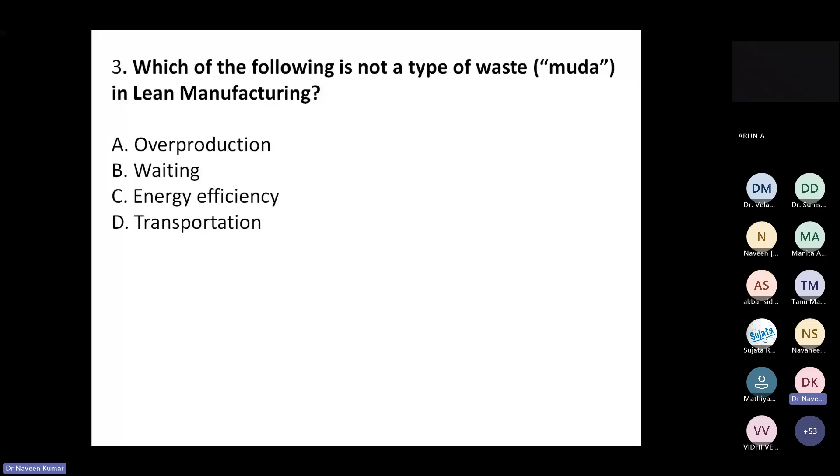Now, sustainability in manufacturing includes which three main dimensions? I think last session you already covered this. It's economic, environmental, and social. Wonderful.

Really appreciating the response in this second half. Which lean concepts promote sustainability by reducing resource and energy use? I think you are aware of these terminologies: Kanban, 5S, SMED, Jidoka. It's B - 5S is the key to implementing sustainability in the lean concept.

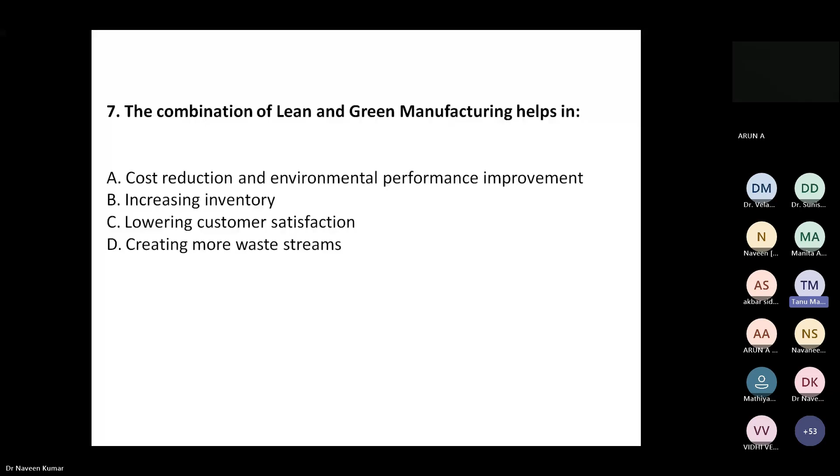Next, the combination of lean and green manufacturing helps us with A, cost reduction, and A, environmental performance improvement. Wonderful. Which metric best evaluates sustainable lean performance?

Energy consumption per unit. Great, sir, nice, this is the correct answer, A, energy consumption per unit. Yes.

Now let's move on - I think you've already covered much more topics. I'll take you through some techniques and terminologies used in manufacturing industries. First we'll cover some theory, then go through some case studies. My topic is sustainable lean manufacturing in automobile manufacturing.

As you already read, sustainable lean manufacturing is the manufacturing of goods through pollution and waste-free processes, which improves the environment and conserves energy with high economic impact. The very important terminology I focus on is the 3P: people, profit, and planet. The blue one is the sustainability part, right?

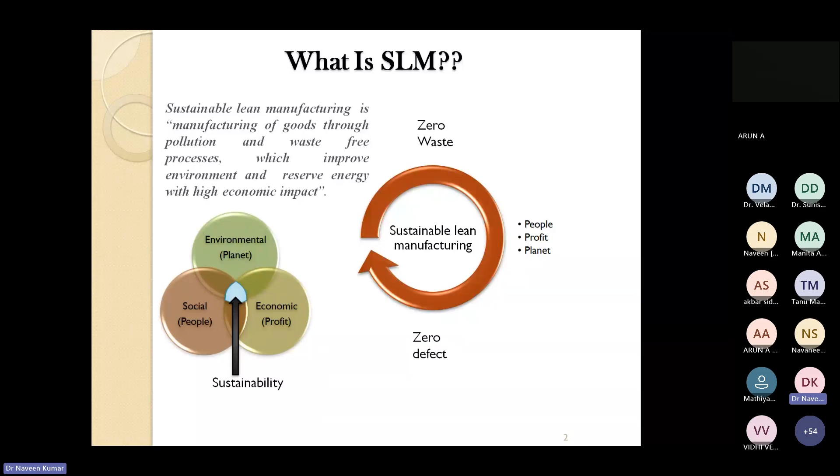Now, what is circular manufacturing? A circular economy is an economic model that eliminates waste and regenerates systems. The working principle is to design out waste and pollution, keep products and materials in use, and regenerate ecosystems. Both techniques are equally important and relatable, because sustainable lean manufacturing talks about economy and environment, and here also we focus on both.

Why does circular manufacturing matter to us? It reduces raw material dependency, enhances ESG and brand sustainability profile, supports compliance with environmental standards, and enables cost savings through reuse and recycling. The focus of the circular economy in manufacturing today is on reuse and recycling.

ESG is now a brand image for the automobile industries. Whichever supplier has the ESG rating and performs well on ESG criteria has a good brand image as compared to others.

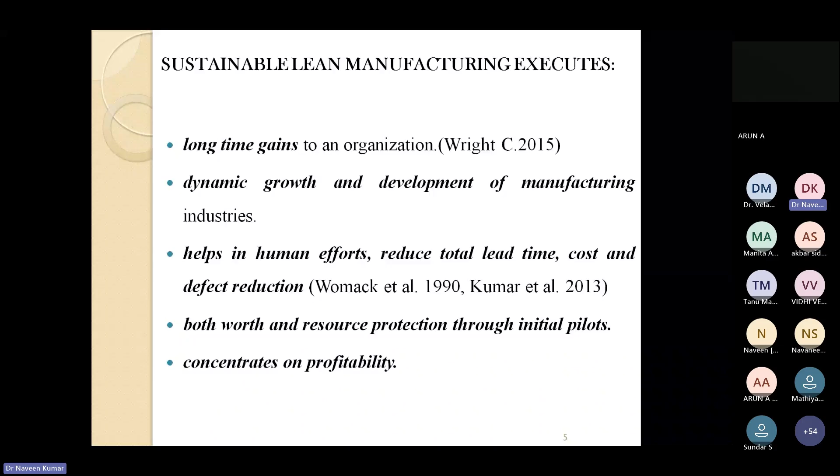Now, if we talk about sustainable manufacturing among the processes, as I explained, I really appreciate all of you. You contributed a lot in the MCQs, and mostly the answers were correct.

Again, in the sustainable manufacturing process, first we take manufacturing cost. As I explained in the previous slide, manufacturing cost reduction is the ultimate demand of the customer. That should be minimum. Now the environmental impact should also be minimum.

And energy consumption, leading to all the environmental impacts - as of today, what we are doing in our industries is moving towards solar energies. We are implementing ways to reduce energy consumption throughout the processes. That should be minimum, and waste management should be maximum.

Waste management - don't confuse it. It means how to manage the waste. We have to drill down the processes in depth to identify where the process is and where waste generation occurs, and we have to eliminate all the impacts at the processes where waste starts. At that moment we have to control the waste. The need for waste management should be maximum.

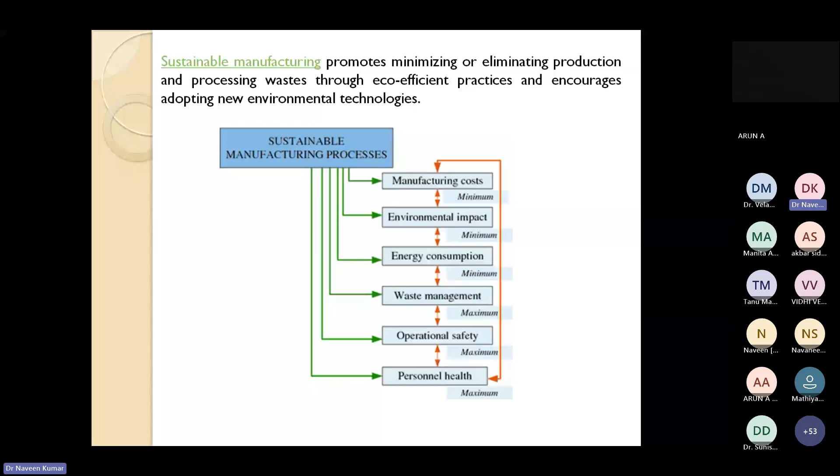Now, sustainable lean manufacturing focuses on society development, employee growth, and motivation for society. Motivation for society means employment generation, educational goal setting, and helping develop the same. It's very wonderful - many organizations and industries have started sessions for the children of employees. They start coaching at the 8th and 10th standard stage, focusing their ideas in our operations, as well as motivating employees to contribute to other business development activities and ideas to take forward.

Now, the environmental aspects focus on green environment, working environment, energy conservation, recycling, reuse, and reprocessing material. As I already touched upon during circular manufacturing, recycling, reuse, and reprocessing material is equally important to achieve the ESG goals. This is the main criteria industries are focusing on and using in day-to-day activities, and one of the most important is following international standards.

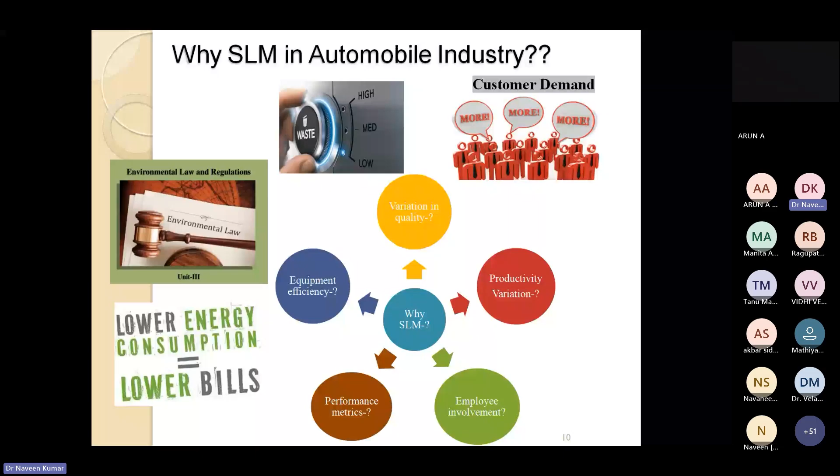Now the environment impact of manufacturing. The manufacturing process, I think you already covered in a previous session: working material and input energy, electric, fossil fuels, then output product, byproducts, and output is greenhouse gases, various pollutants and toxic solid waste. It's contributing again to global warming, and that is not good for human and our ecosystem.

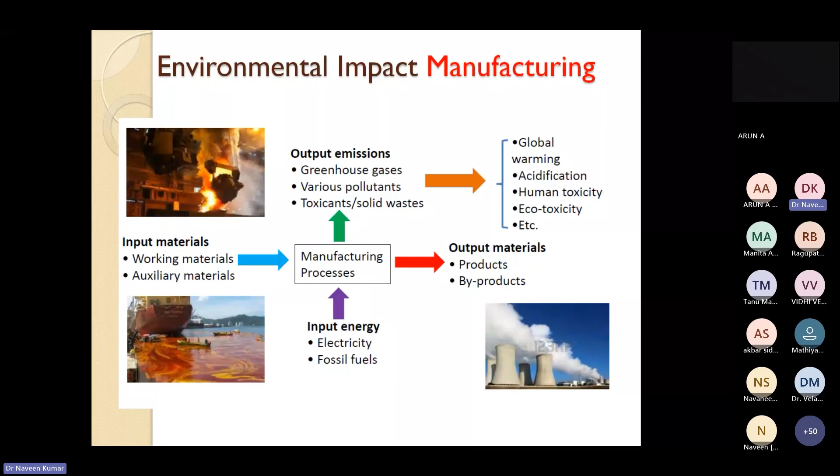We are touching the highest ever sale, all other two-wheelers and four-wheelers. From the last 10 years, the highest ever sale is going to happen this year and this festive season, right? The consumption rate is daily increasing. Our sustainability rate is quite down. We have to focus upon minimizing this gap.

And how will we achieve it? It is the challenge. It is the day-to-day work upon. We'll discuss in upcoming slides.

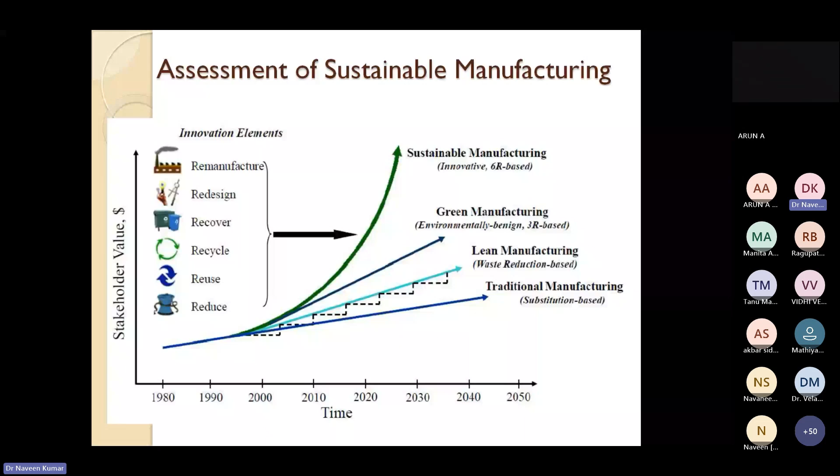The assessment of sustainable manufacturing, we started from traditional manufacturing. Lean manufacturing we worked upon, green manufacturing we worked upon, sustainable manufacturing. Now we are working on all these together and moving towards ESG goal 2050 and somewhere focusing on the 6R.

Now the sustainable manufacturing processes, what we should do to achieve that gap and to achieve that slope. What is our requirement? We must use optimal usage of energy, material, labor, and other resources, which leads to minimum waste and minimum emissions.

This is the prime responsibility of a product development manager who is leading that project, right? Now we have to produce sustainable products that can help our generation and give minimum impact on society. And these inputs come from the product design and the process design.

The design for sustainability principles, focusing on functionality, recyclability and remanufacturability, start from the design stage, right? And the processes start with energy efficient technology adoption and safety-free, safe environment, accident-free, focusing on the

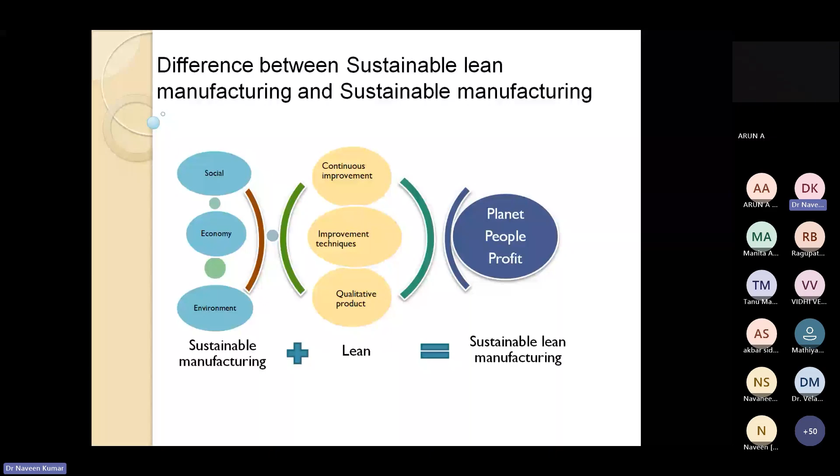Now, there might be some doubts about sustainable lean manufacturing versus sustainable manufacturing. Sustainable manufacturing is social, economic, and environment, and lean focuses on continuous improvement techniques and qualitative products. That is focusing on people, planet, and profits. This is what it's called, and this is the prime output for sustainable manufacturing.

Now, sustainable manufacturing to promote the circular economy is only feasible through a total and multi-life cycle based approach to close loop material flow by adopting the 6R as we discussed.

Now what is important in this slide is the one message we have to focus on: to reduce in every life cycle stage. We have to focus on reduction, right? We have to reduce the process time, we have to reduce the wastage, we have to reduce the distribution lead time, and the resource consumption in every stage. It is very important nowadays. We have to focus.

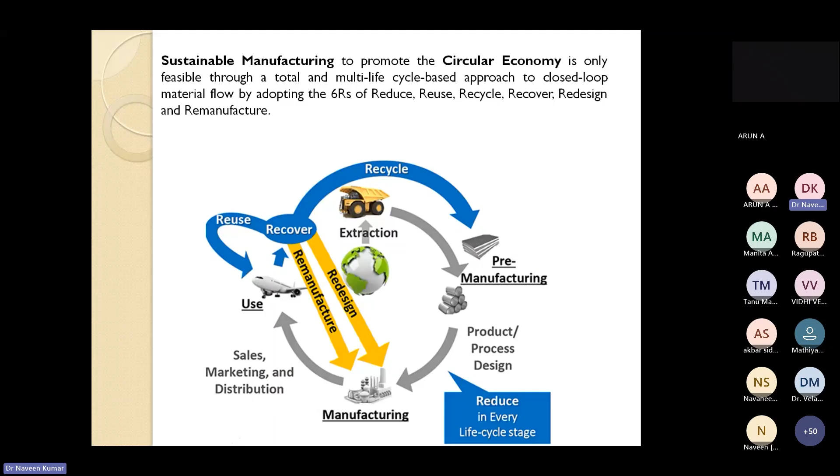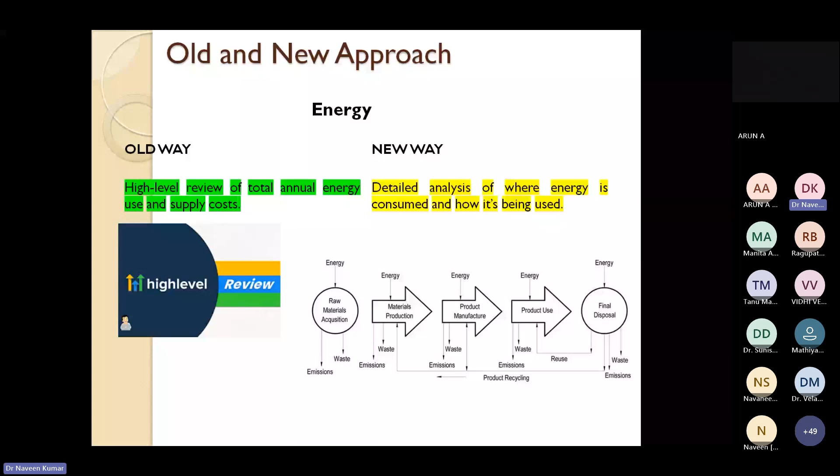Now the manufacturing, year on year and month over month, production comparison of resource utilization.

Hello? Am I audible? Yes, sir, you're audible. I think there was some disturbance, something happened.

Now the new way is real-time examination of resource utilization, location, and rationale. It's live streaming of production, output rate, quality rate, and performance rate. Everything is now online, and we can get the data and store it, track who is doing the activity, who is giving the output, compare resources, and allocate the best resources for the best operation to get maximum output.

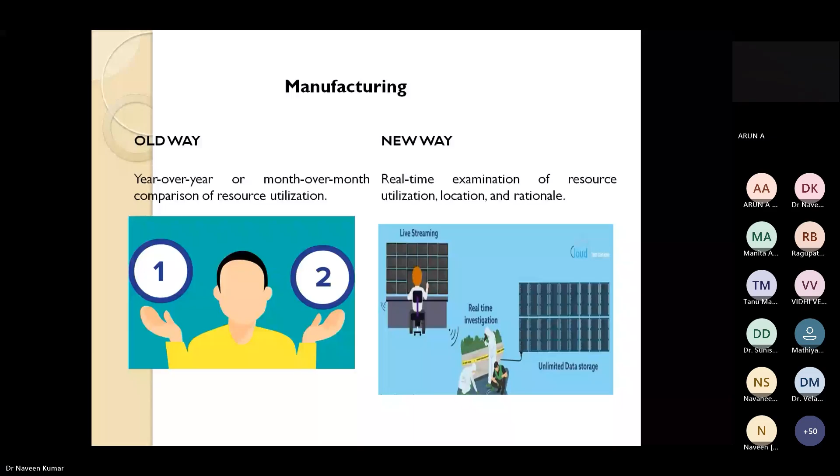For process excellence, we have focused on these ways. Now the important thing is waste analysis. We started in the old way with problem, solution, then success. The new way, we focus on root cause analysis processes, day by day, starting from failures.

We start from customer feedback, then we prove the process, identify the process, and start multiple agencies involvement, cross-functional team involvement, in analysis of that particular process to stop creating waste in the first place.

As I already explained, focusing on first time right, we have to reduce waste at the first operation only. If there is generation, we have to reduce it. We have to make zero waste, zero defect at that process.

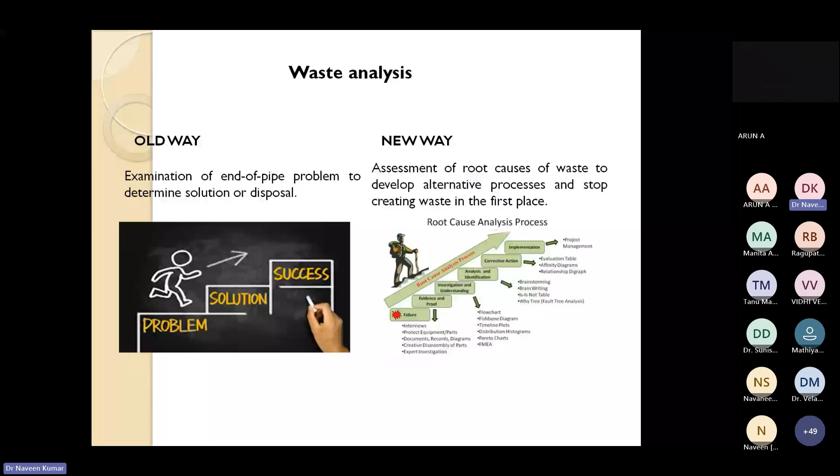We are focusing on the innovative elements of sustainable manufacturing: product innovation, process innovation, and system innovation. We distributed all these innovations to respective departments and stakeholders, making them responsible, and taking it forward for organizational improvement and goals. This helps us implement the best way to get maximum output.

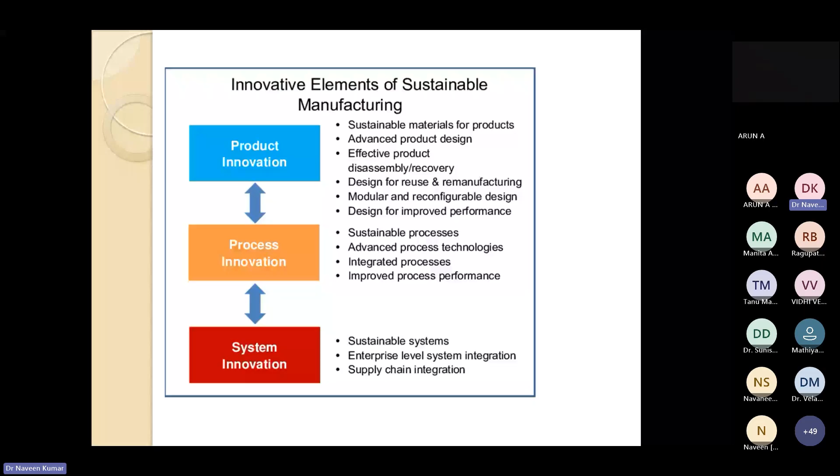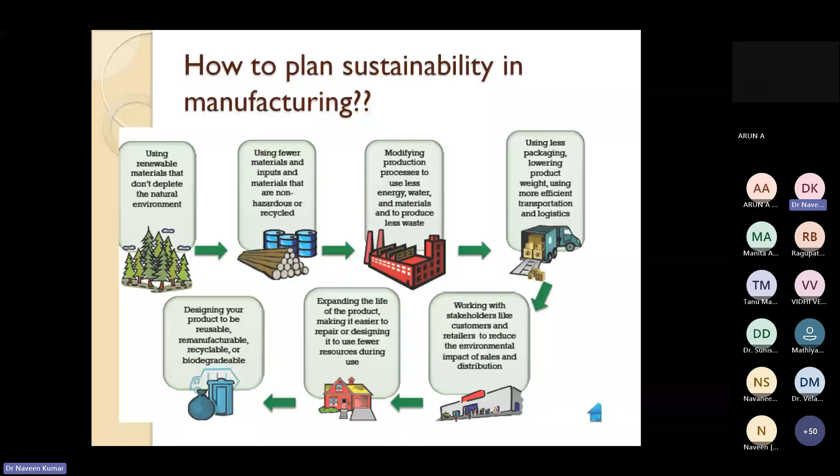And this, thank you. Now let's take you through some of my problem statements and case studies.

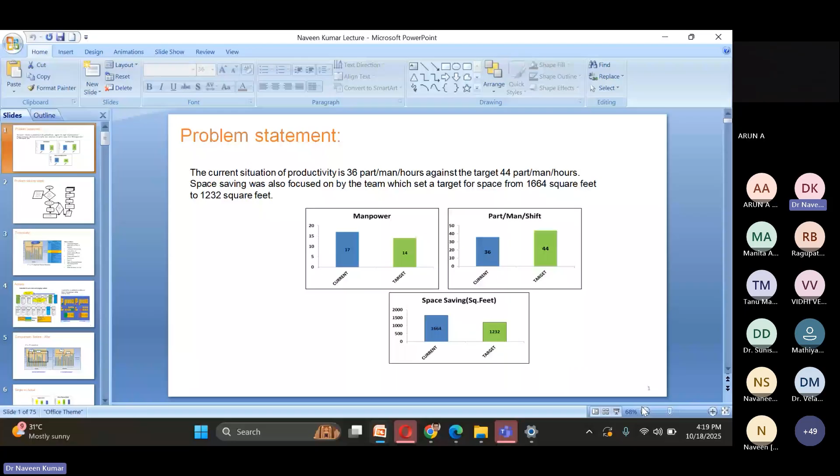The problem statement was at the supplier end: productivity was less against the targets, and the space available at the organization was also less. So what we targeted was to reduce manpower, increase parts per man per shift, and achieve space saving as well.

We focused on the problem solving steps, PDCA, and started sustainable lean manufacturing. We went to Gemba, listed down all the inputs, processes, and times, and started verification, implementing actions, horizontal deployment, and standardization. We used these problem solving steps.

During the time study, what we found: there are 17 operations in this fuel filter assembly line, where operation 7 has the maximum cycle time against a takt time of 36, with a cycle time of 47.

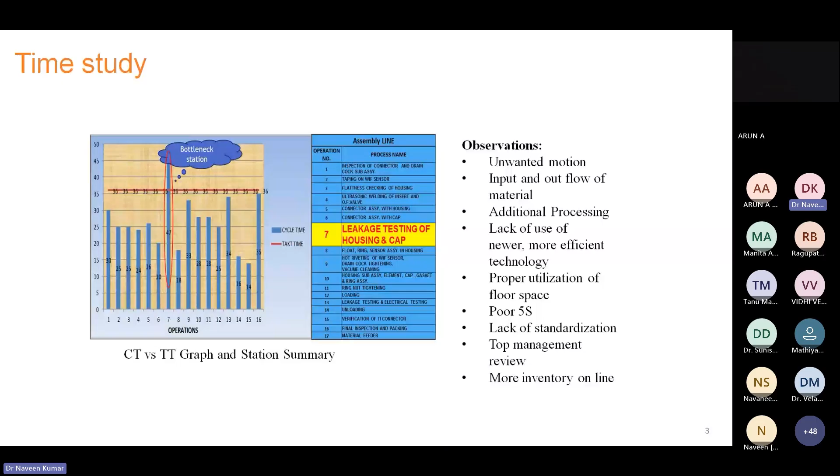These are some observations we found during videography analysis, and we identified actions for each observation. We started reducing cycle time by converting non-value added activity into value added activity, and started elimination and merger of two workstations to reduce space as well.

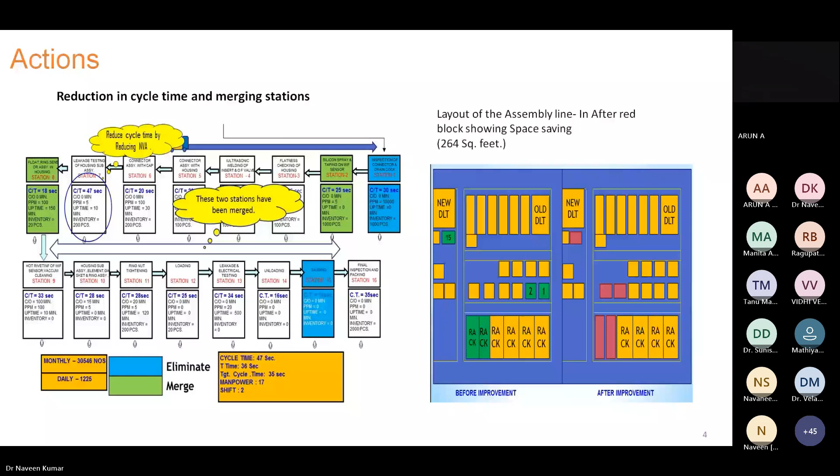Before improvement, the layout was on the left side, and after improvement the red highlighted cells were eliminated. These are the comparisons before and after: the cycle time is now reduced, shown on the right side, and we went from 16 workstations down to 13 workstations, with the maximum cycle time now at 35 seconds against the 36 second takt time.

Now we did a manufacturing implementation through a case study of total employee involvement. As I explained during the matrix of sustainable lean manufacturing, we did analysis and data collection on

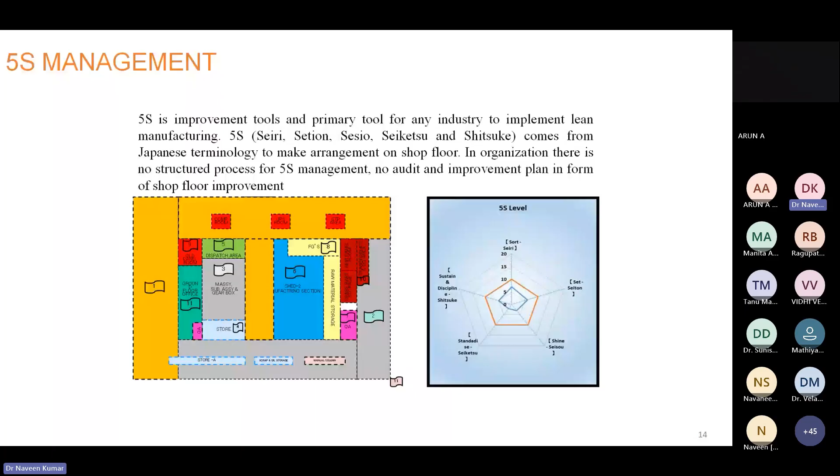Now it is very easy for the organization to deal with 90% of problems through total employee involvement. As at the start of the question, 5S is important for implementing lean, and lean is in relation with sustainable manufacturing. We started quality circles as well as involved employees in the PDCA approach.

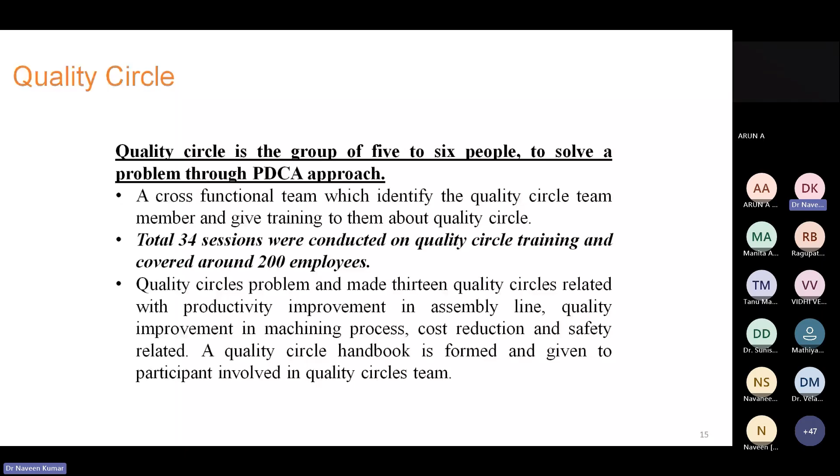We started CFT - cross-functional teams - to get the session, get the training, and around 200 employees got involved to start these sessions and benchmark the assembly lines and quality improvement in other machining processes, as well as some safety related measures. As we see, the performance matrix changed after implementing this data,

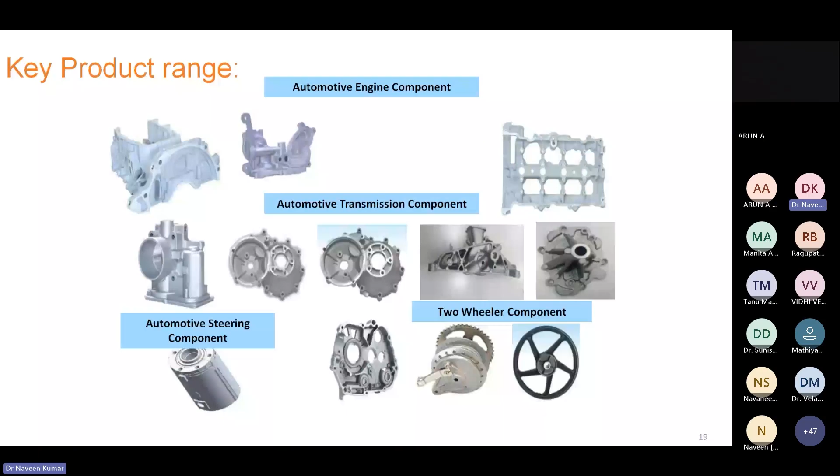Now, this is another case study of manufacturing some transmission components. The approach was to collect data on natural resources, pollutants, and factors affecting environment directly or indirectly, and an input-output diagram of critical processes, to identify improvement gaps and projects, and take measures to reduce consumption at the first

step. If not possible, explore the possibility of reusing and recycling it, and look for new technologies to reduce consumption. Measure the trend and action, standardize and deploy horizontally at all applicable areas. We used this approach to get this implemented.

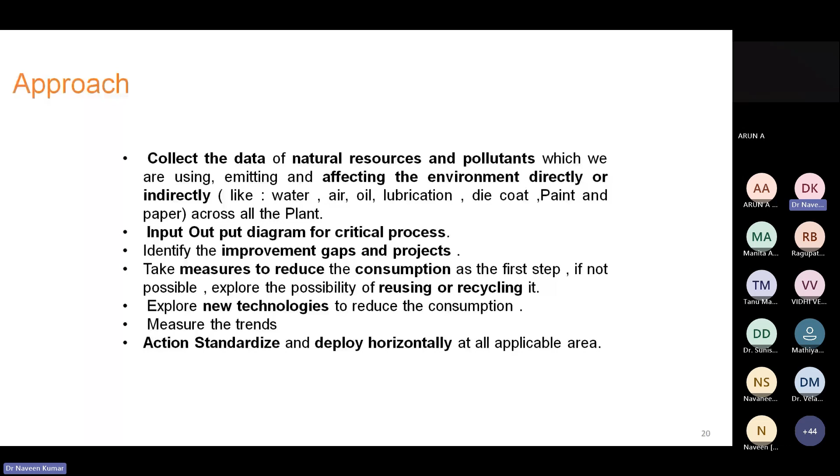We started with a policy in place to get it implemented throughout the organization.

We defined the organization chart and implemented coordinators, pillar code leaders, and members equally in different pillars like energy management, water management, waste management, prevention of pollution, substitution of hazardous chemicals, and environment compliance and management.

We put every pillar under a department head or a person who has the best knowledge of that particular process. He is the owner to lead this pillar and is helped by the CFT members, which helps get all pillars in place and reviewed by the top management.

Then the master list of the organization process we mapped and key sustainable aspects. We get input, electrical energy, fuel, gas and water, energy utility management, transformer, DG air compressor, water treatment plant, air handling units, and cooling towers we mapped.

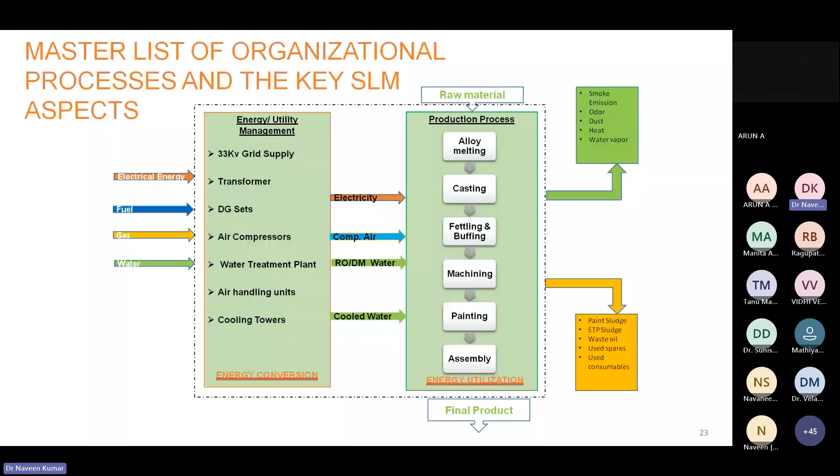Then we found there is output of electricity, compressed air, RO water, and cool water. And using this process flow: raw material, alloy melting, casting, fettling and buffing, machining, painting and assembly, and energy utilization and the final product. The output to this is to the environment: smoke, emission, dust, heat, water vapor, paint sludge, ETP sludge, waste oil, used spares, and used consumables.

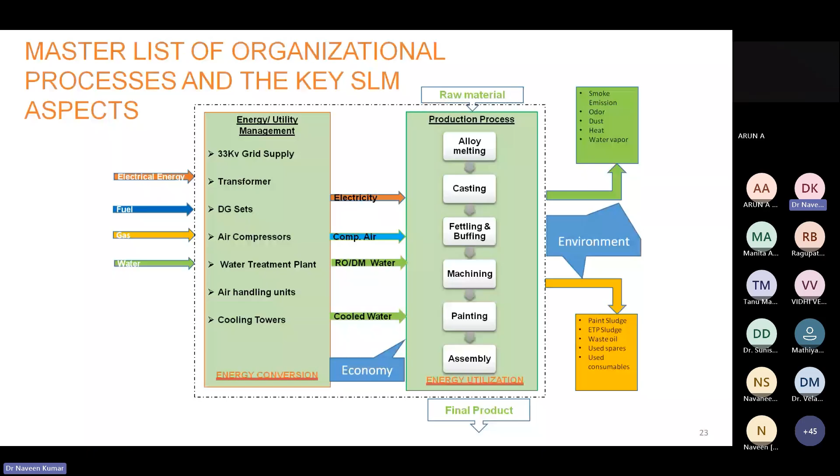Environment and economic, these are focusing outputs we have to focus upon.

As I explained during my theoretical session, we implement all processes. We started detailing of every process. We start from alloy melting. What is the energy uses? What is the compression air uses? What is the fuel? What is the water? What is the raw material? What is the spares we used?

And alloy melting process, what are the process controls? What are the applicable emission controls? What are the automation controls? And what are the safety PPEs used in these processes?

What is the input and output diagram? What is the energy saving devices? What is the fuel saving devices? And what is the material movement control?

And most important for the environment aspect, the emission to the air. What is the capacity versus actual melt? What is the fuel efficiency liter per ton? What is the product quality report? What is the emission compliance records?

And what are the losses? Very important to track: what is the energy losses, what is the fuel efficiency losses, what is the thermal losses, what is the burning losses and breakdown losses. We found all these things here in alloy melting processes.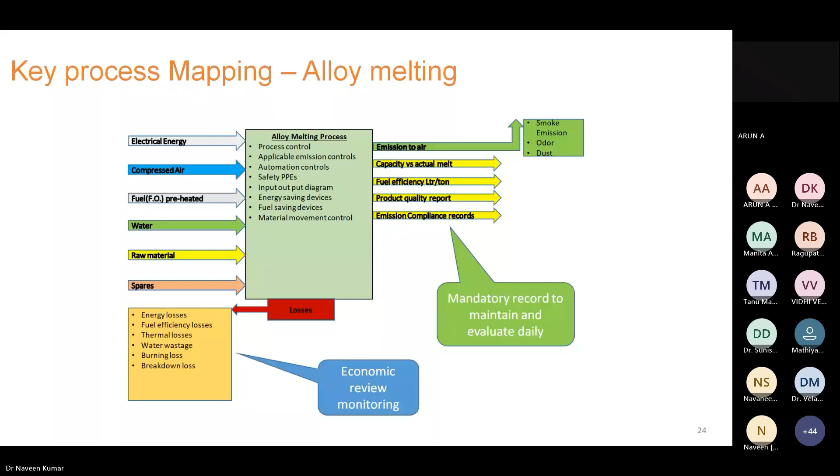Now we move ahead, likewise for all processes, and mandatory records evaluated for review meetings. Same likewise we focused on HPDC processes, and along with this we focused on electric energy mapping throughout the organization, where and how the energy is going to consume, and identify which are the maximum energy use areas: HPDC casting, GDC casting, and the paint shop, which is contributing major electric energy losses as well as consumption.

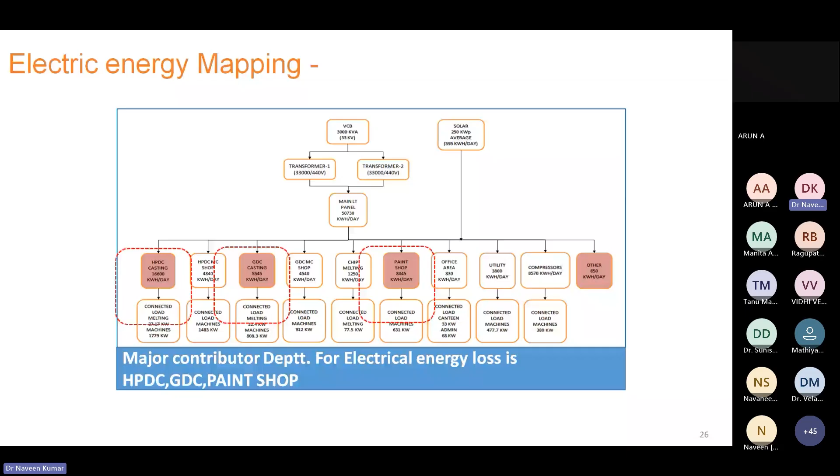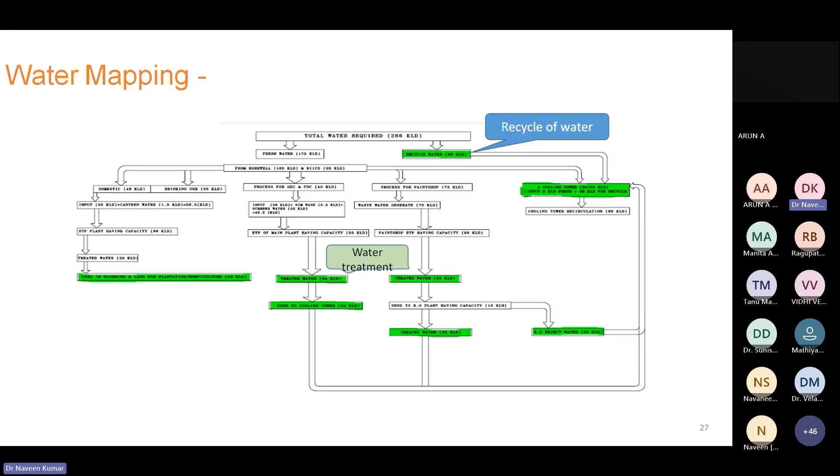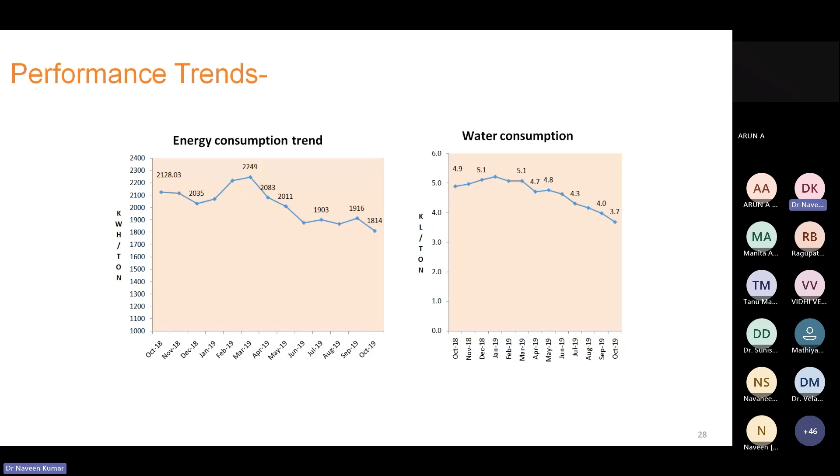Same as we map for water mapping, water uses and other recycle water and water treatment, we focused all among and took action for recycling the water maximum as we can. Now, as we see, the energy consumption trend is reduced drastically and water consumption also reduced drastically. The specific hazardous chemical consumption and specific industrial effluent generation also reduced in this study. This was very helpful and important for the organization at the supplier.

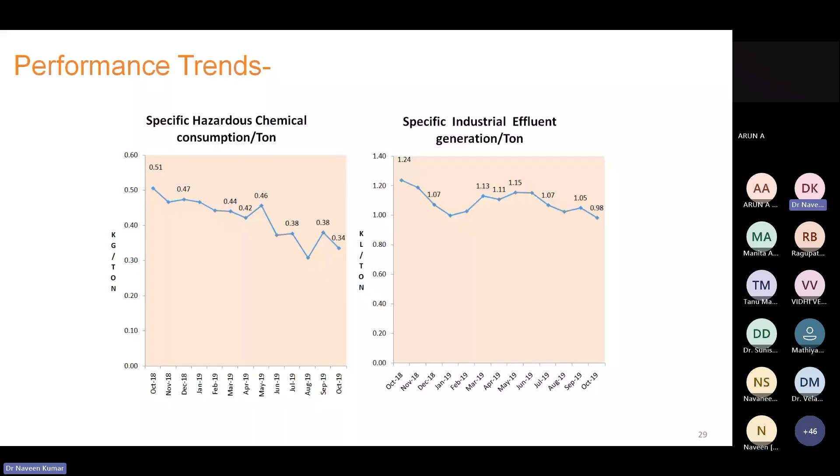Now, likewise, there is another important setup change time reduction case study also done at one of our suppliers to implement and reduce the wastage in changeover time. During the CFT evaluation, there was the process flow. By the way, I just missed, this is the CNG cylinder process flow, what I did at Maruti Suzuki India Limited supplier.

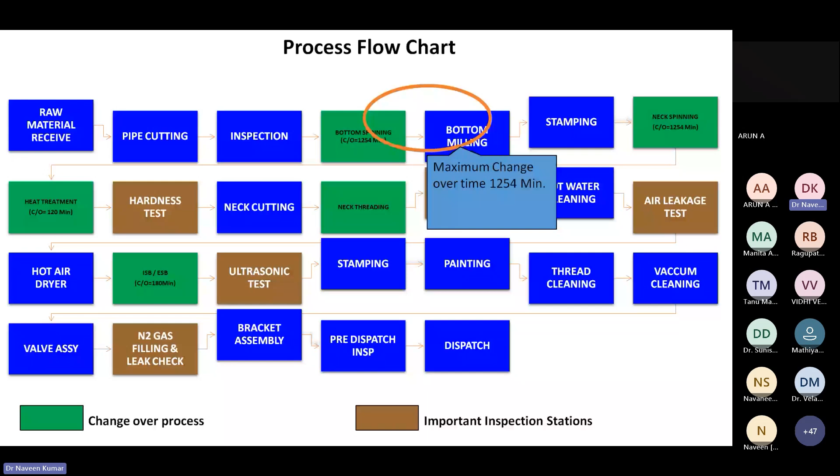There is raw material receiving, pipe cutting, inspection, bottom spinning, bottom milling, then stamping, then neck spinning, and these are the processes used. The green ones are the changeover processes where changeover happens, and the maximum changeover time was 1254 minutes. The average time was 1254 minutes and the target was 850 minutes to meet the customer line, customer productivity. These are the action plan, PDCA approach we used.

Then we identified there is no sequence defined for setup change activity. All activity found online, internal, no tooling identifications. In place of tooling and bolt was also not defined. And complexity in changeover activity is there. Activities to eliminate for same diameter also not defined.

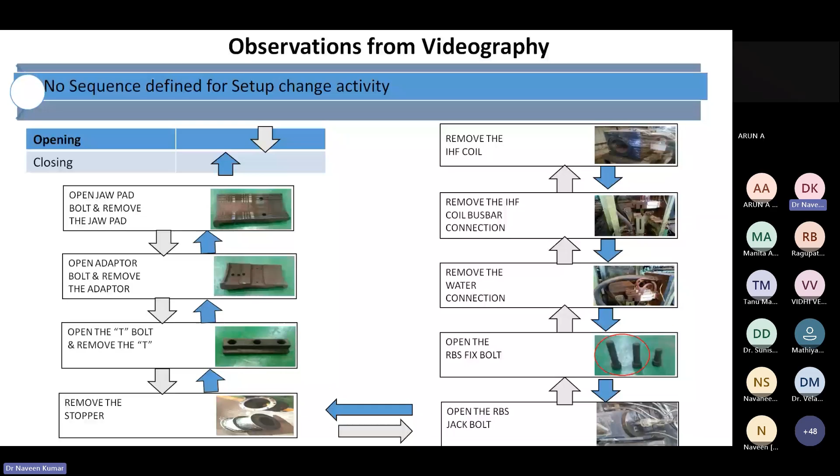Then the no sequence defined setup change activity was focused and closed by doing the identification on the bolt, jaws, and every tooling included in that changeover. And all activities found internal, and we reduced the cycle time by putting all activities in external and parallel activities. You see, there are 29 internal activities happening.

There is no external activity and no parallel activity in mind. Now, what is external activity and what is internal activity and what is parallel activities? External activities means at the start of the changeover, the activity can be done—that is called external activity.

Internal activities are the activities which start from the last OK part to the first OK part. Meaning when we stop production and start changeover activities and put out another first OK part, that is my activity. Whatever happens during this stage is called internal activities. Parallel activities are activities within internal which we can start along with another activity by implementing some other resources and automations.

Now we have just identified 4 activities can be done external, 6 activities can be done internal-parallel, and 19 activities can be done internal. Now by this we achieved the changeover time reduced from 1254 minutes to 1050 minutes.

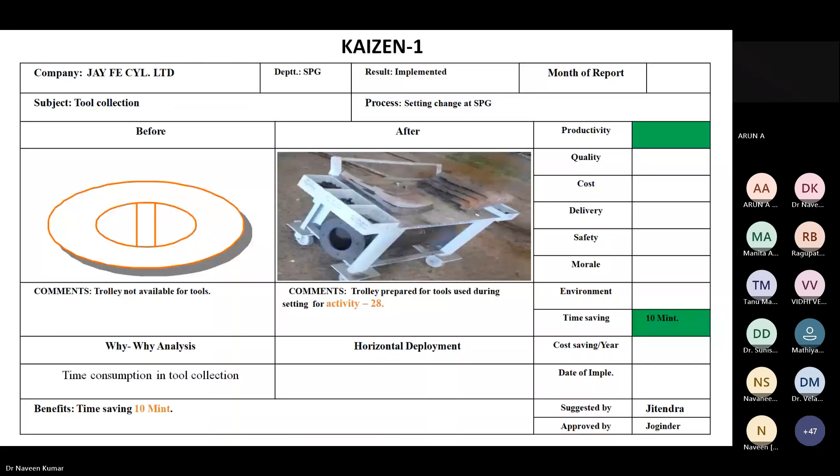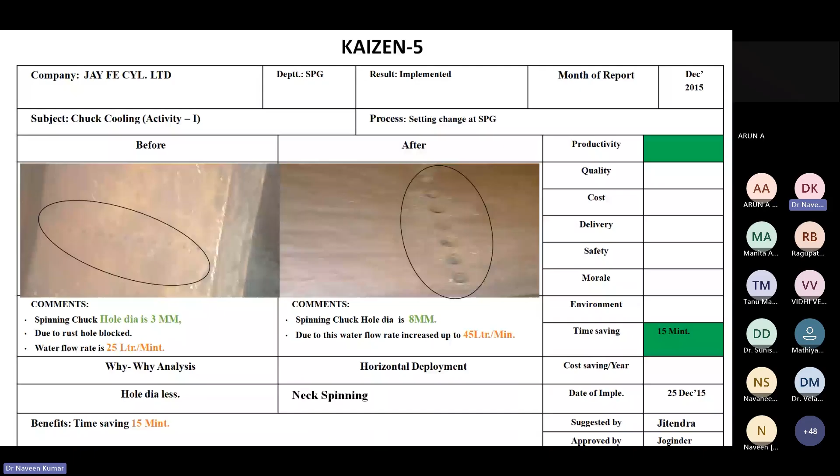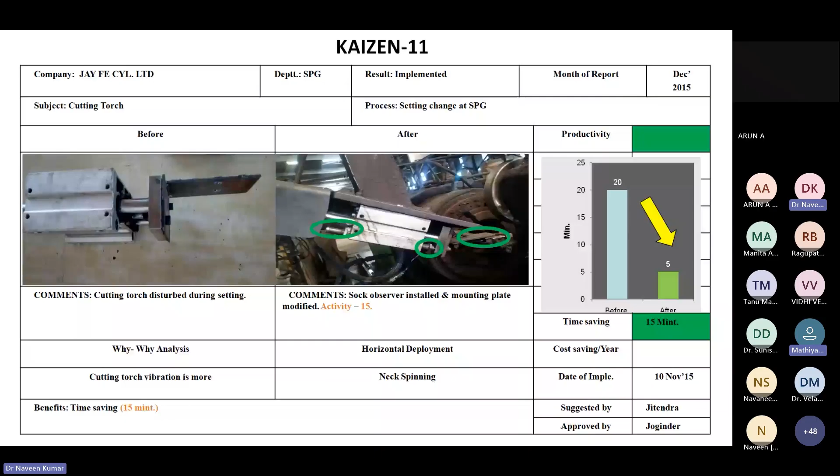Defined special cooling, Dr. Naveen sir. There seems to be some problem in the network, maybe your voice is breaking. Oh sorry sir, now it's fine. Should I go back? Yeah, now it's fine. Okay, go ahead. Yeah it is fine, go ahead. Okay.

There is the same diameter cylinder. This is the activity we have identified and reduced the cycle time, and implemented all the kaizens over here.

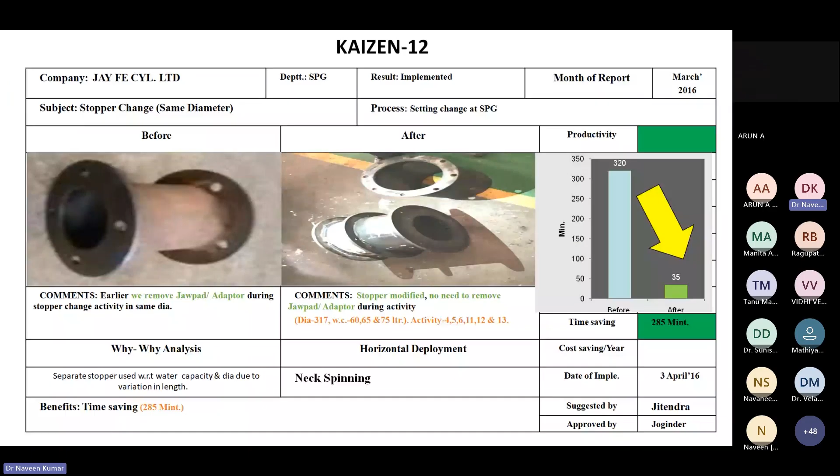As I explained in previous slides, we implemented the preparation of internal activities into the external stage before starting the changeover, and we took only dismantle and setup change activity in the after stage.

This led to a reduction in changeover time from 1200 to 850 minutes. Sometimes through complete standardization of the processes, we achieved a 730 cycle time. By these activities, we increased to 53 cylinder setups, which improved productivity as well.

Now we move to the next theme of value stream mapping. The objective of value stream mapping is to identify and eliminate waste, improve layout, fasten the process, ensure effective utilization of resources, and reduce operator fatigue.

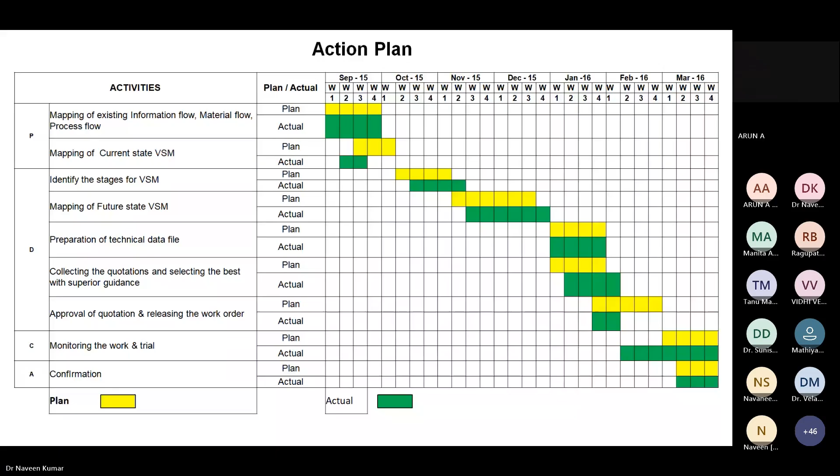This VSM I mapped personally along with my team at the shop floor for the same CNG cylinder at the supplier end using the PDCA approach. If you see the mapping here, I mapped the material movement from pipe cutting, it's moved to bottom milling, then stamping, then it goes to neck spinning.

Then a long way to go, we had an inventory of 2000 cylinders for the heat treatment furnace, because the heat treatment furnace running time is quite high, and its efficiency and consumption rate is quite high in electricity, as well as the production rate being high. So we have to build so much inventory, and then movement to HST and cleaning. This was the material movement before.

Now we have layout modification and we implemented a conveyor direction change. We reduced this conveyor from this way, and the machine layout for manual rotation is also changed. For the hardness tester, we also changed the machine's cylinder orientation, reducing operator fatigue through automation and circular implementation of the hydraulic jaw, then layout modification to reduce operator fatigue.

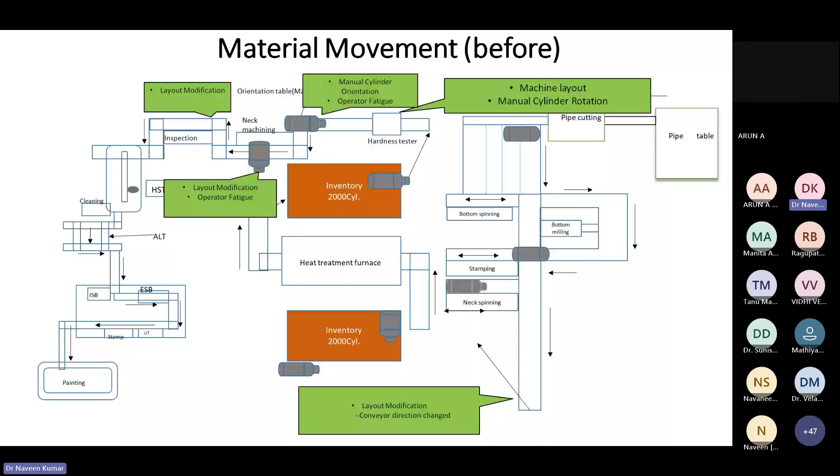Then again, we did layout modification on our line and identified the list of kaizens: first, layout modification with conveyor direction changed; machine layout changed at hardness testing; lifter wheel assembly installed at the hardness testing machine; bed layout change and kicker installed at neck cutting; cylinder feeding conveyor installed for neck cutting operation; loading and unloading bed layout modified at machining HMC.

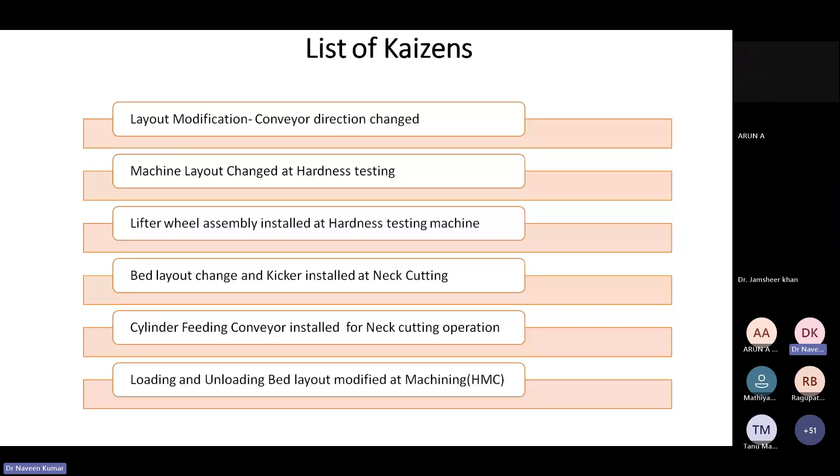These are some examples. This is the kaizen lifter wheel machine. Earlier it was done manually by 2 operators. After implementing the lifter wheel assembly, movement is done by a hydraulic lifter, and there is no role for any other manpower here.

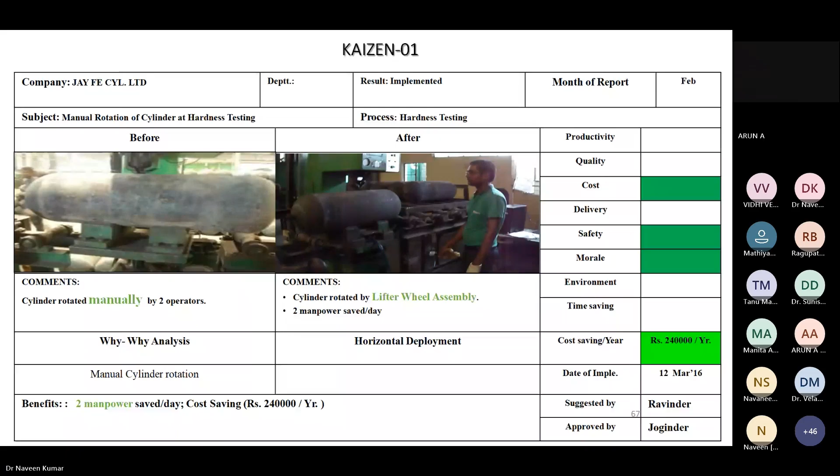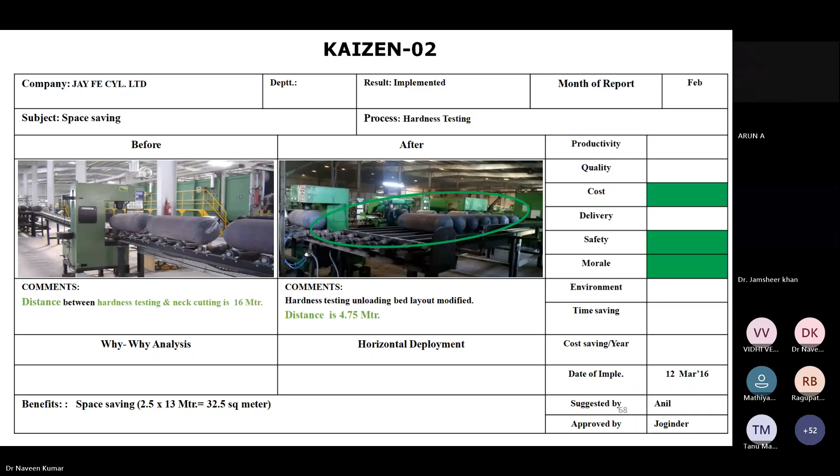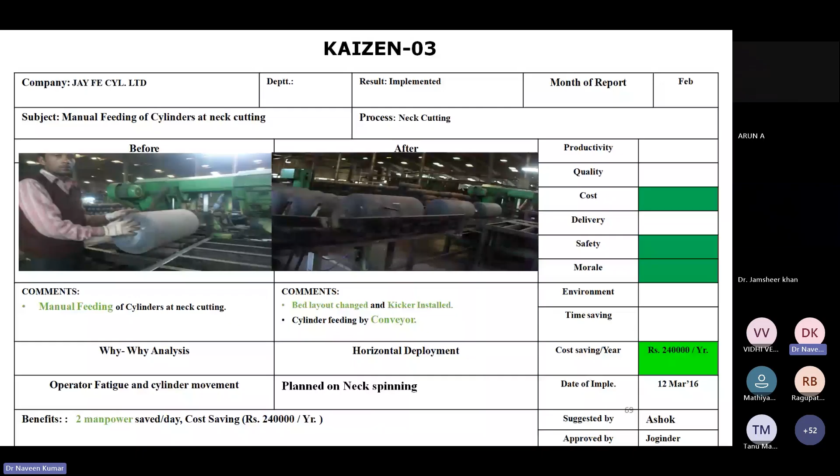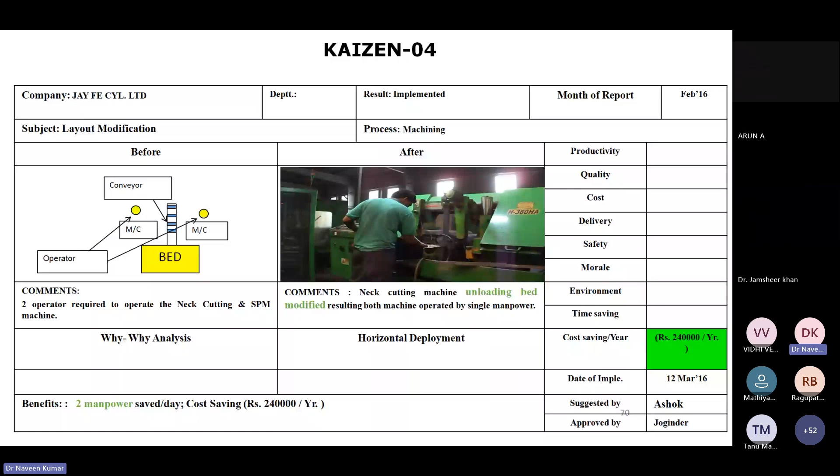Another SPM is installed for neck cutting machines, and the unload bed is also modified here. These are again both unloading beds, now done by a single operator.

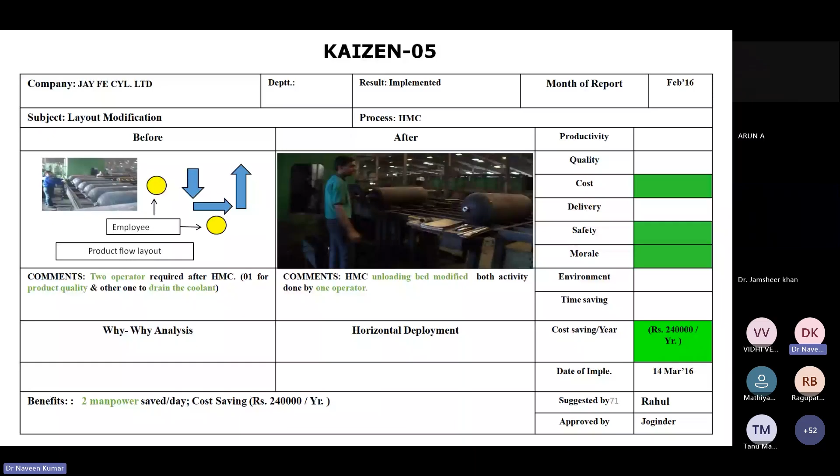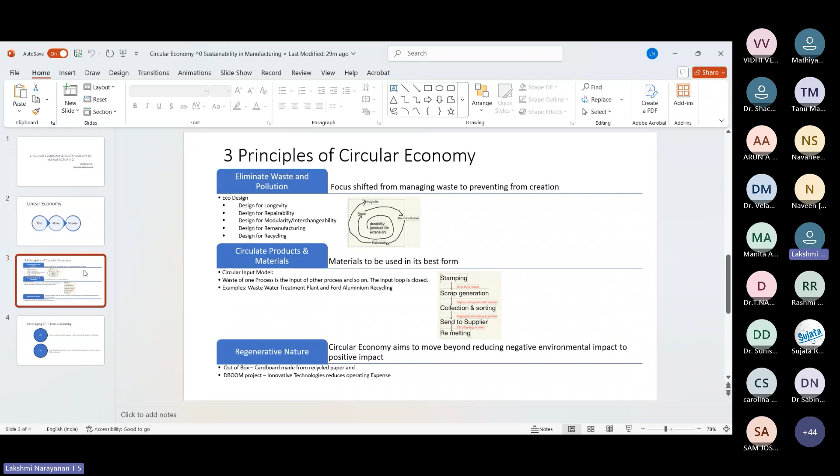So if a component, for example a housing, is damaged or repaired, instead of changing the entire bearing, we can just save or change the housing. There is one classic example where SKF adopted this concept in a cement manufacturing plant in Turkey, where they replaced this housing, and because of this they could save almost 60% of cost and reduce almost 34 tons of CO2 equivalent. Instead of manufacturing the entire bearing, they just replace the housing.

And the second core principle of circular economy is to circulate the input, so the output of one process becomes the input of the other process. That's what we do in the circular economy.

Like, for example, because I come from a wastewater treatment plant, our system is designed in such a way that we don't discharge any liquid, and we recover 90 to 95% of the wastewater. Wastewater comes from two sources mainly: one is the effluent that comes from the process, and the second is the sewage water that comes from other uses, like using washrooms and all those things. Both waters have to go through a different set of processes, and we design it so that we recover almost 90 to 95% of the wastewater.

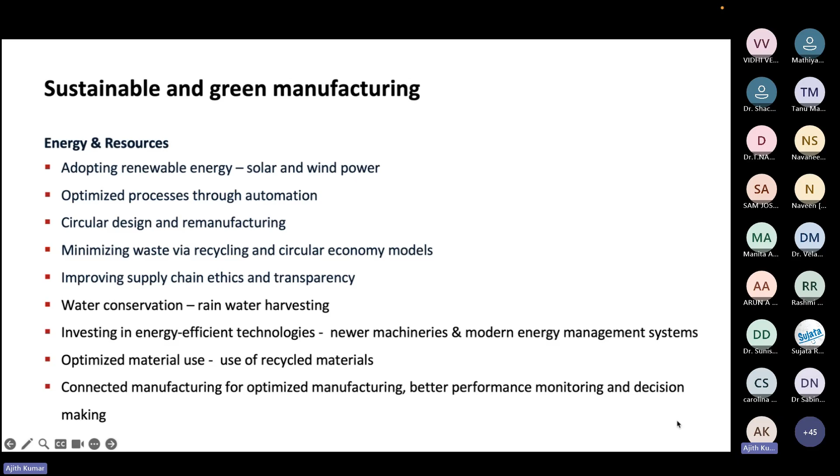This is connected manufacturing where there is full utilization of the existing system. For example, in a factory there are 5 different production lines, and based on the utilization of the lines, when the demand comes for production, from the ERP systems this can be routed to the appropriate line so that all 5 lines will be equally loaded. This is similar to the load balancing concept in computer internet technologies.

Because of that, increased efficiency is achieved and the product quality is going to be higher because production is optimized in each line, and there is better worker experience. Rather than one line being fully occupied while people on it are overloaded, if it is distributed, they will be equally loaded. Because of that, the waste will be lesser and operational cost is reduced.

There are analytical solutions from the software industry like IBM Planning Analytics with Watson. IBM Watson is their IoT platform. This IoT platform will be able to collect parameters related to emissions as well as carbon footprint across different categories, and it will be able to give analytics in real time for decision making.

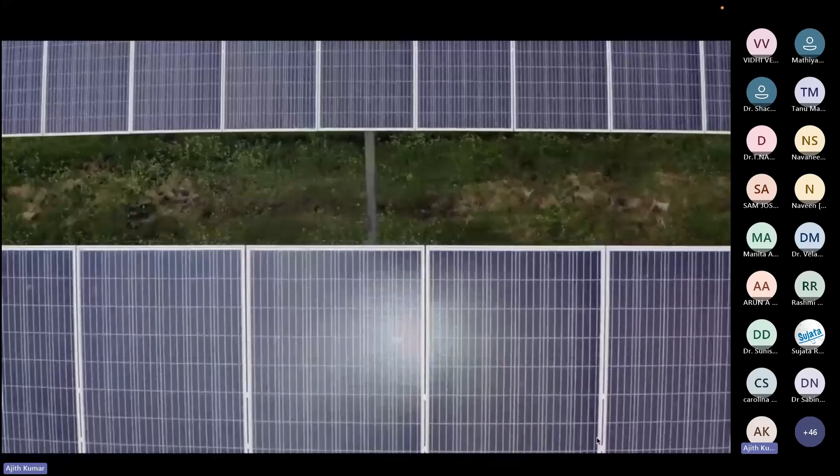Over the last decade, Siemens has made a name for itself in sustainability circles by developing key initiatives to help society wean itself from fossil fuel dependency, integrate renewable energy sources into power systems, and electrify transportation. While these efforts are essential, Casciano believes that SME empowerment could prove to be even more pivotal in decarbonization efforts. Individually, SME carbon footprints are small, but as a whole their impact is colossal. If such organizations could eliminate or even reduce their carbon footprints, the positive environmental effects would resonate for decades. Motivations are present, but many firms lack the skills, strategic direction, or technical knowledge required to act on their aspirations.

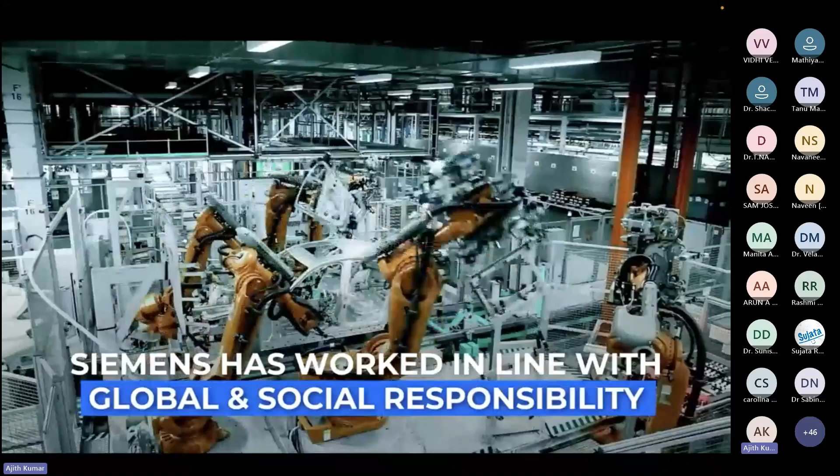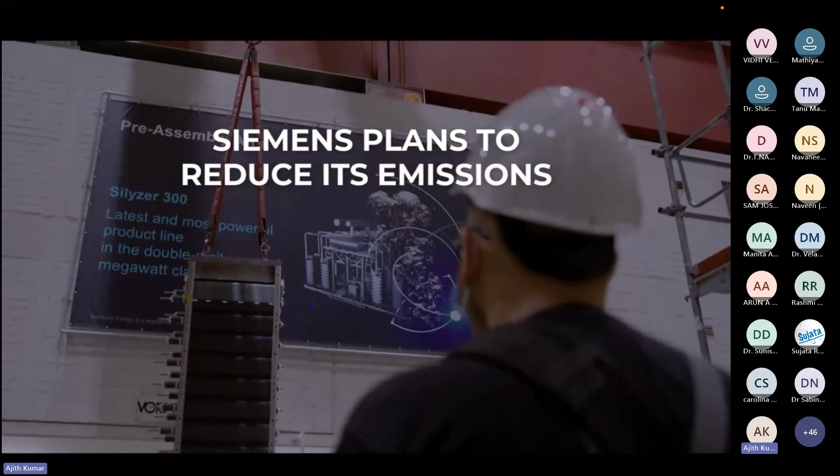These are troubling gaps, but fortunately one corporate player is already stepping up to help. Since its founding in 1847, Siemens has worked to establish itself as a globally responsible innovator that weighs technological progress and socially responsible action equally. Six years ago, it was one of the first major corporations to commit to achieving climate neutrality. In the years since, Siemens has established even more ambitious sustainability goals, including a 20% reduction in emissions across all regions by 2030, and a fully net zero supply chain by 2050.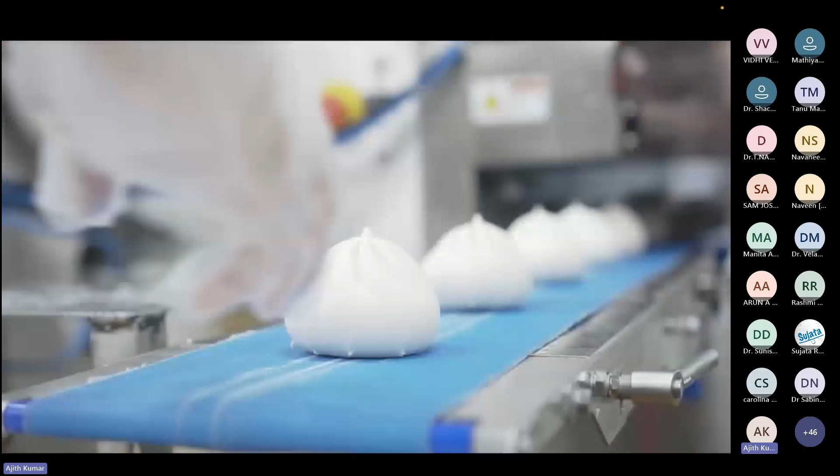In 2020 alone, the company's USA region empowered its customers to save a whopping 150 million metric tons of CO2. Siemens consultants take the time to connect with SME leaders, understand their goals, establish a viable sustainability strategy, implement any necessary technology, and deliver a tailored financing strategy. Today, Siemens stands as one of the foremost players in financing greenfield renewable projects and has helped countless businesses meet their decarbonization goals. Everything that SMEs need to help save the planet is available, Casciano summarized. Now we must work together to harness the potential.

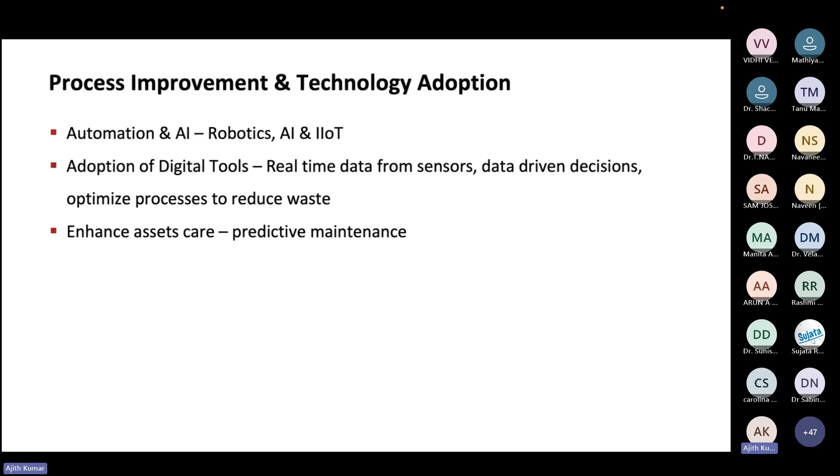So why I took this Siemens video is because Siemens is very conscious about sustainability initiatives in their process as well as every product that they manufacture. Siemens is one of the industry leaders in providing hardware as well as software solutions for many manufacturing organizations. So with this initiative, they are able to ensure that their carbon footprint is reduced. At the same time, all their customers who use their products are also getting the benefit out of that.

So digital twin, this is going to be a very interesting area in the near future because in manufacturing industry, a new product is designed and goes through different rounds of refinement until the product is made final and released to the market. So if we are having a digital twin, which is a digital equivalent of a physical machine or a product, or it can be a process, or a production or assembly line, any of these four categories can have a digital twin.

The advantage is that the digital twin is developed using software. Any change in software you can make easily without impacting the environment, rather than manufacturing a product, testing it, making a lot of changes, and again manufacturing it, removing some components and installing new ones. So all those things can be really reduced once we use the digital twin. That's why the digital twin concept is becoming very popular today.

So this is going to have a huge impact on society as well as on the environment. This is one of the initiatives which happened a couple of years ago, and it is becoming very popular. In the next decade, this will be one of the core technologies in the market.

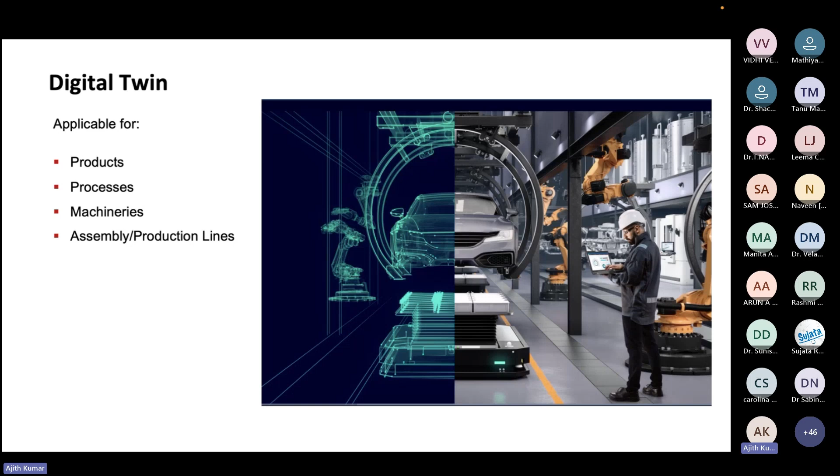So smart manufacturing with industrial automation is very much required for reporting the sustainability initiatives in real time from the production line or the manufacturing systems, for energy savings. Now everything is automated, with very minimal human intervention required in the manufacturing process. So once the production planning is there, you have the design, and then everything is put to the machine, and the machine is going to do all these things.

We'll be able to get a lot of inputs in terms of reports with the sensors as well as automated solutions, which will help to do analytics with AI and data analytics, and give inference in your HMI so that you will be able to take a decision based on that. Smarter control of machineries, safety in factories, remote monitoring of machineries, speed to market, and optimizing production - all those things will be part of the smart manufacturing initiatives.

This is going to have a positive impact on the environment as well as society in terms of reducing waste as well as reducing greenhouse gas emissions, and remanufacturing with circular economy principles.

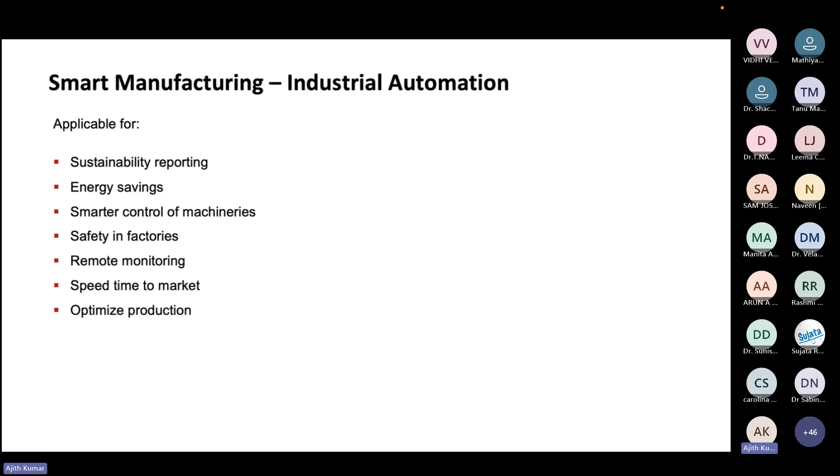So I'll run one more video. That is one of the initiatives of ITC Limited for contributing to sustainability.

As you may know, ITC started as a tobacco manufacturing company. So even today, they understand there is huge criticism from across the world for having a tobacco products company. So they diversified into other business areas like foods, hotel chains, as well as agarbatti and others. They have invested a lot for the planet as well as for the people. Their initiative is not only related to energy utilization or reducing carbon footprint - at the same time, they do a lot of things for human beings as well. So this video will tell those initiatives.